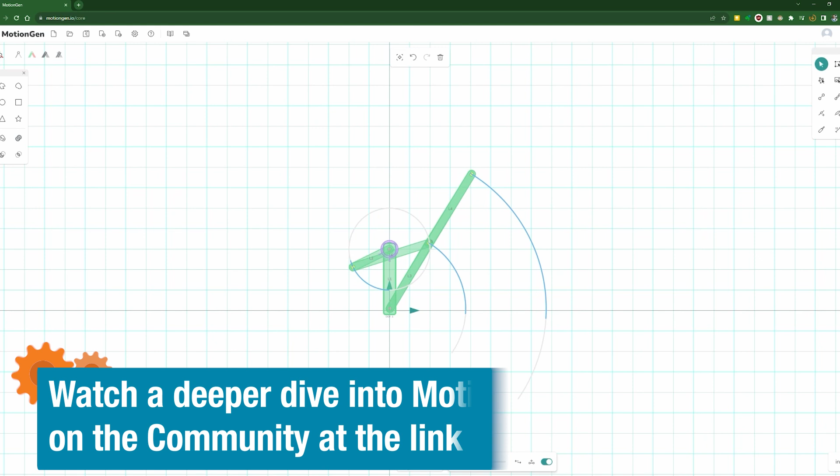I want to show you a free cool website I found. It's called MotionGen. It allows you to prototype different kind of linkages and mechanisms and animate them so you can see how they will work. MotionGen was a really useful site to test out and prototype the linkage system, but let's draw a rough sketch of what I want to make in the end. So of course we want to hang the ornament on the Christmas tree branch.

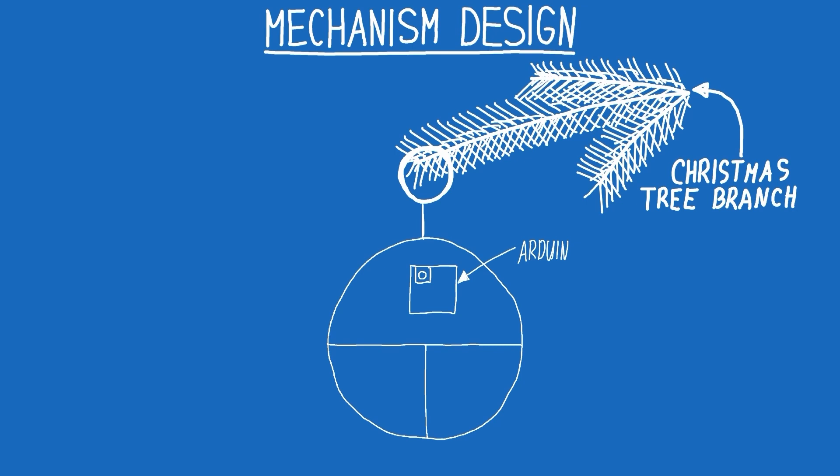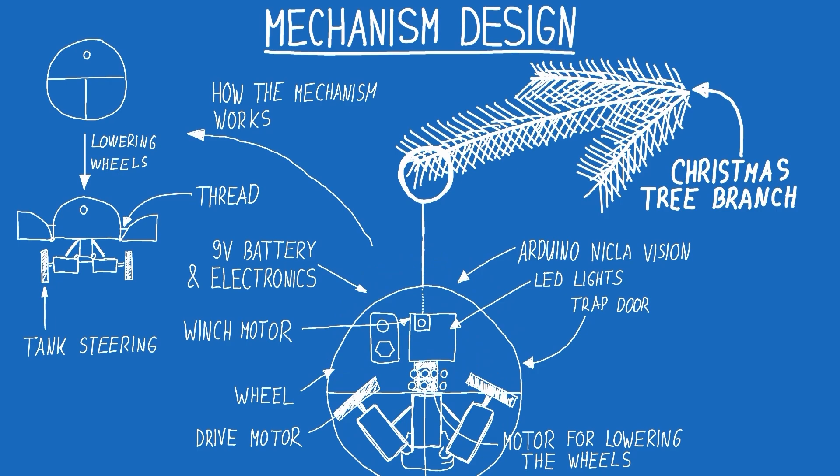I'm going to use the Arduino Nicla Vision as my main computer for this ornament. We will have two drive motors so we can have tank steering with wheels on them of course, and we will have a central motor for actually lowering those wheels. At the top we'll have the winch motor for lowering up and down the whole ornament. 9-volt battery, electronics. Here is how the whole mechanism works. The trapdoors open and the wheels drop down when the position servo actuates, and that's how the whole system will work. Let's jump into CAD to actually model this thing and then go to making it.

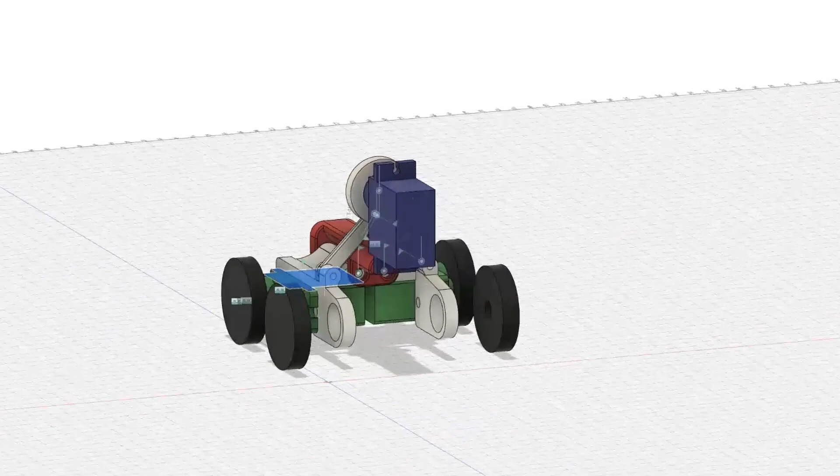So we have this blue position servo, which by turning 180 degrees will lift these two segments up. These green motors are the continuous rotation servomotors, and this here is just a hole for the bearing that will go here. So how this mechanism works is, if we drive this joint upwards, you can see both sets of wheels going up, and this is how this looks packed. It took a bit of playing to see how big the wheels can be, as well as the distance between the wheels, so everything gets packed nicely.

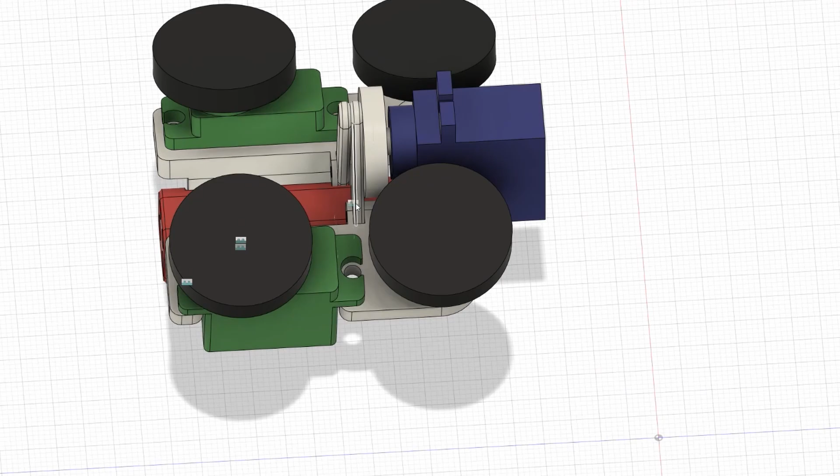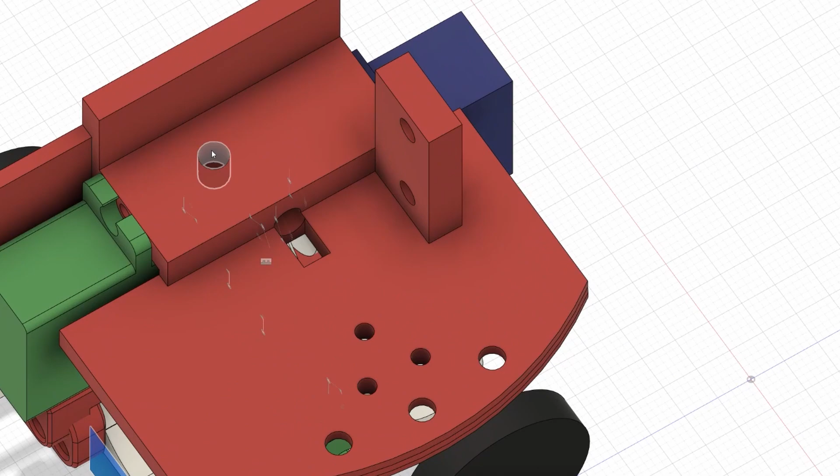Now let's take a look at how the whole robot will go up. So this is the winch servo, and this is the small winch onto which we will actually just add some thin but really strong fishing line. On top of that goes what I call the upper bridge. This is the platform that will hold all of the electronics, but also has a 4mm hole here for guiding the line from the winch servo to the top of the Christmas ornament.

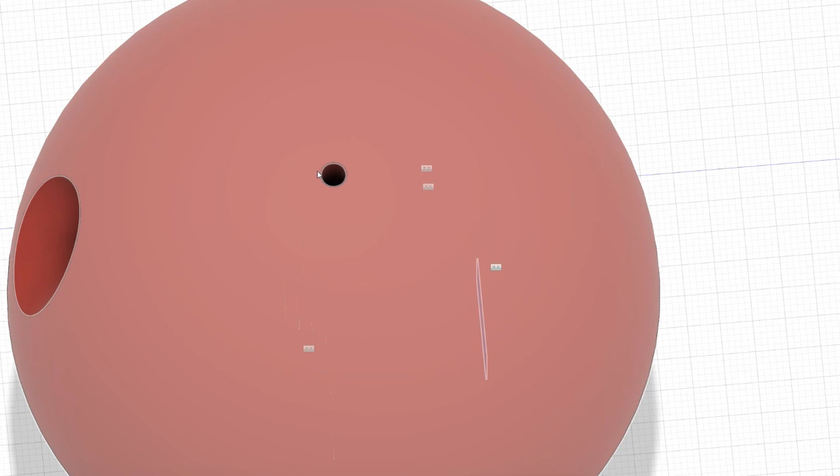The idea for the 4mm hole is to use a piece of PTFE tubing that's usually used for things like 3D printers, so the line has a smooth path. And on top of that we have the top dome, so this is where the PTFE tube comes out and the line goes out. The last part from the mechanical aspect of the design is the bottom half of the Christmas ornament. The first part is this part, which I call the shell ring. It attaches to the top half.

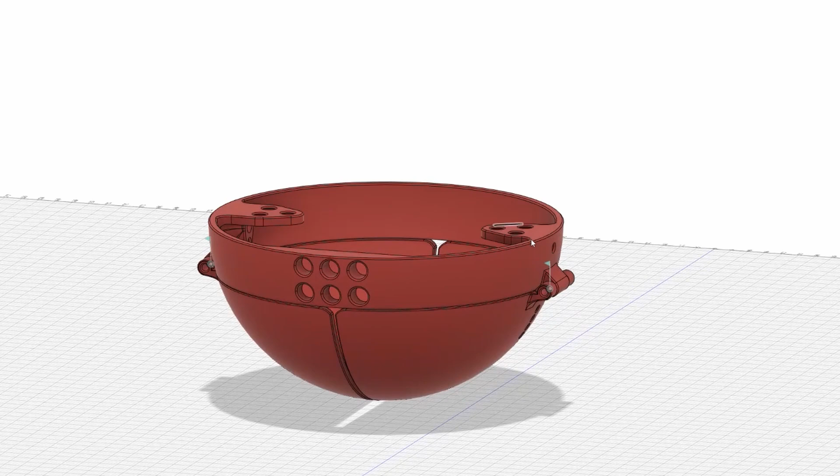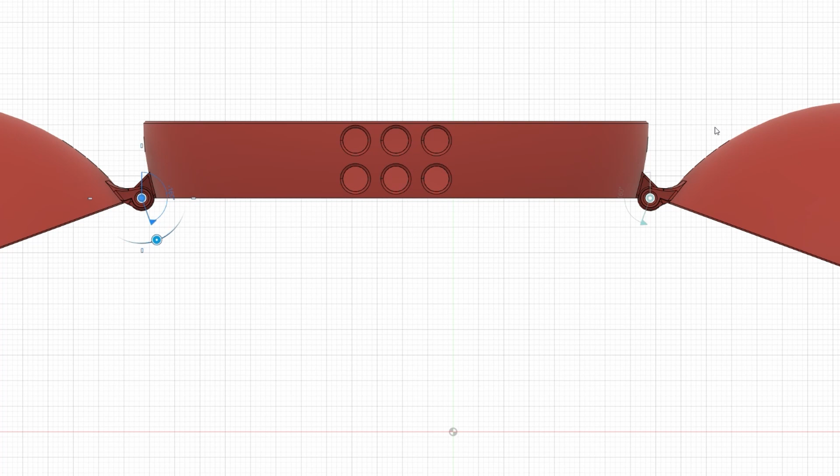It houses the 6 LEDs that we want for night driving, let's call it that. And it also has the mounting points for the trapdoors. So how this works is I had to put the hinges on the outside for the trapdoors, so the angle at which they can open is enough. They will open at about 150 or 160 degrees, something like that, so that when they're open, the wheels have enough clearance to actually touch the ground without the trapdoors themselves scraping the ground.

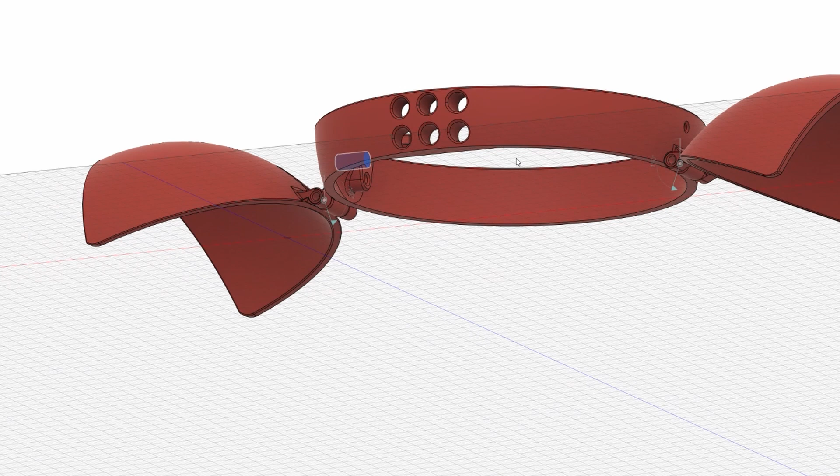The trapdoors are actuated using string that's pulled by the same servo that lowers the wheels. The string is attached to these holes on the trapdoors. It goes through here and then it just attaches to the same spot as the linkages for lowering the wheels. The only other thing is how do we return the trapdoors. They're returned by attaching to this hole here and here by using a simple rubber band. It's a simple solution, pretty crude, but it does the job.

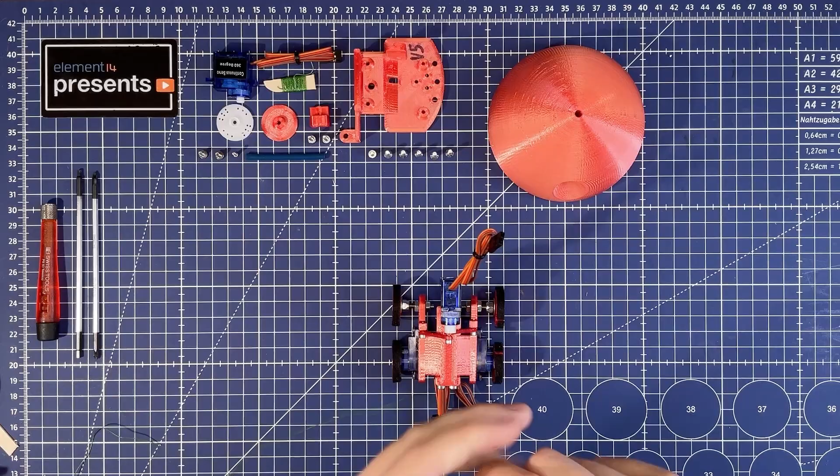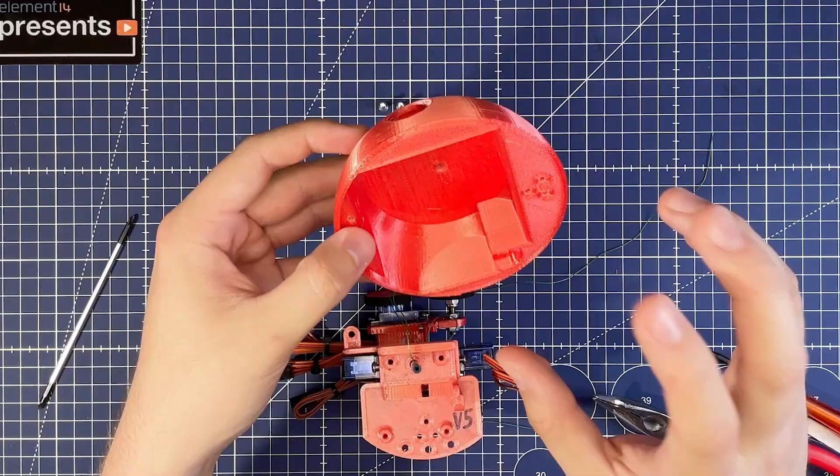So the idea with the string is it will pull the trapdoors from the outside so they open. And with that we have attached the winch motor to the main assembly. Before we actually screw it on, it's much easier to now thread all of the wires through. And now we're supposed to attach this whole assembly to the top dome. And with that we have the whole top half assembled, as you can see.

Before we actually assemble all of the electronics, put everything inside and also add the trapdoors, I think it would be fun to actually test out the winch, seeing the whole robot going up and down. I've just hung it using a keyring on my top-down filming rig, and I've attached the Arduino that we used for testing the servomotors. So it will go one way for 3 seconds and the other way for 3 seconds. So let's power it on and see what happens.

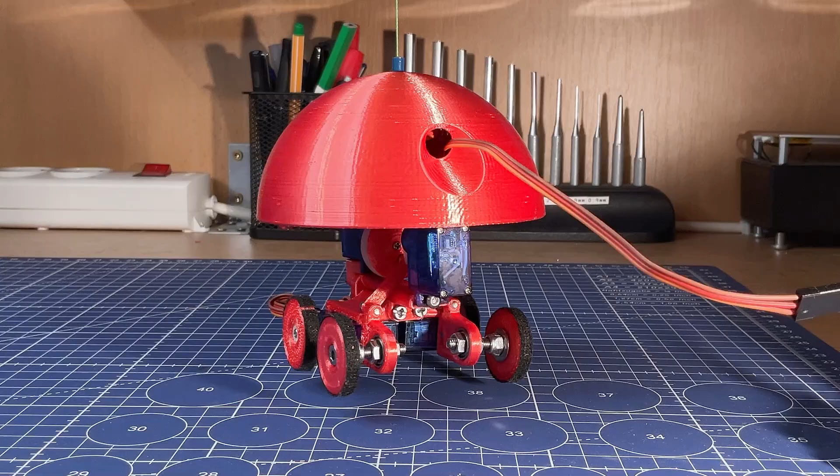It's going up now. It's going up a bit slower than going down because of the force that's actually applied to the motor. But again, the motor is plenty powerful to actually get the whole Christmas ornament up, which is amazing. This is by far my favorite part of the mechanism.

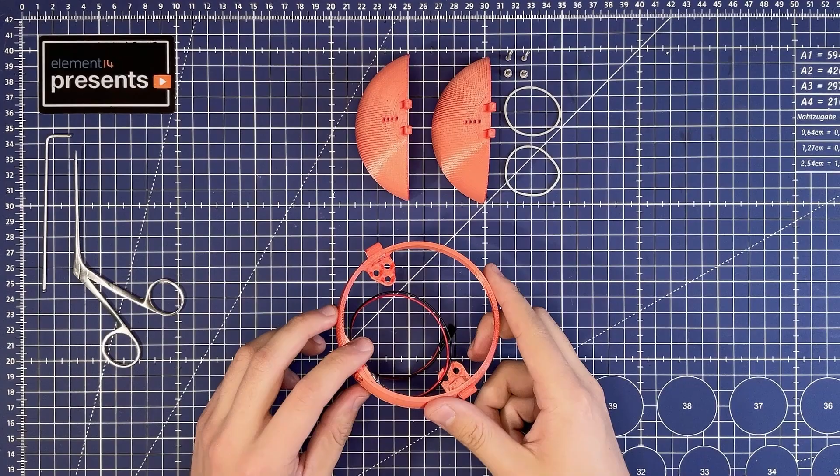Now that the top half is complete, all that's left to do is assemble the bottom half. So this is the shell ring we've assembled previously and soldered and tested the LEDs, as you can see here. Now let's first attach the rubber bands before attaching the trapdoors to the shell ring. And as you can see, both are now moving pretty freely.

We need to tension this rubber band, and with that everything is finished when it comes to the bottom side. So now when we open this, it will just close because of the rubber bands. So that will be it for the whole mechanical assembly of the Christmas ornament.

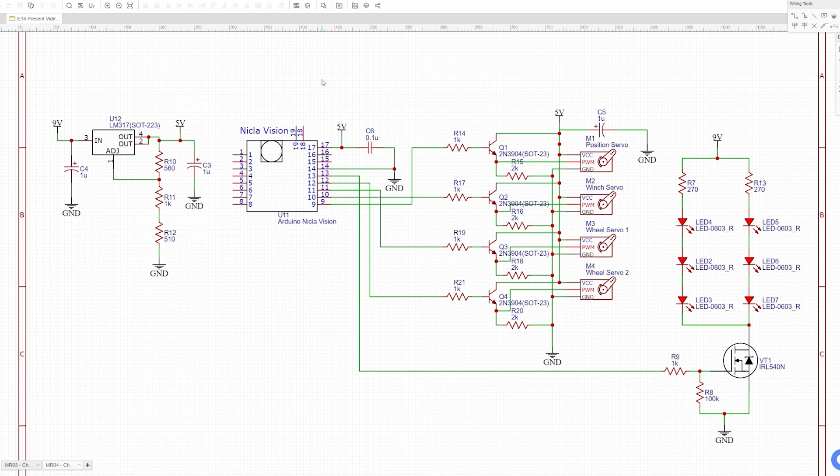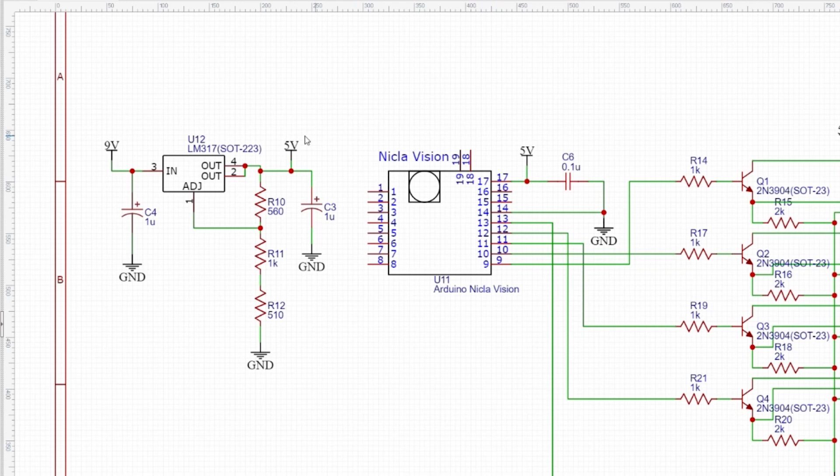Now that we're done with all of the mechanics around the robot, let's take a look at the electronics and all of the things that will go into the robot. So I want to power the robot using the 9-volt battery, but we need to drop that voltage down to 5 volts to power the Nicla Vision. The VIN pin on the Nicla Vision can handle anywhere from 4.5 to 5.5 volts. So I will be using a linear regulator to drop the voltage down to 5 volts.

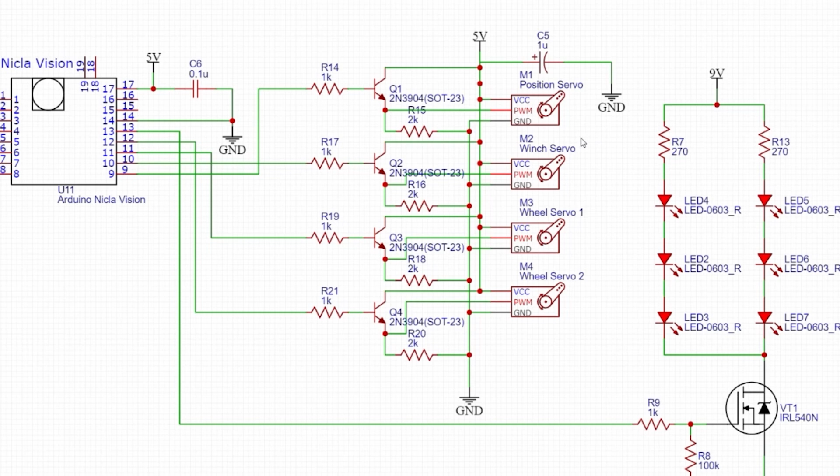Besides that, I'm using a small MOSFET to actually control the 6 LEDs for the lights, so we can also drive the robot at night when nobody's looking at the Christmas tree. And besides that, we only need to control the 4 servomotors. To actually control them, I had to add small transistors because the pins actually weren't strong enough to drive the motors properly, especially the continuous ones, because the PWM signal just didn't look too good, and this is the easiest way I found to fix that. Okay, so let's go and solder this before we can actually assemble the whole robot completely and test it out.

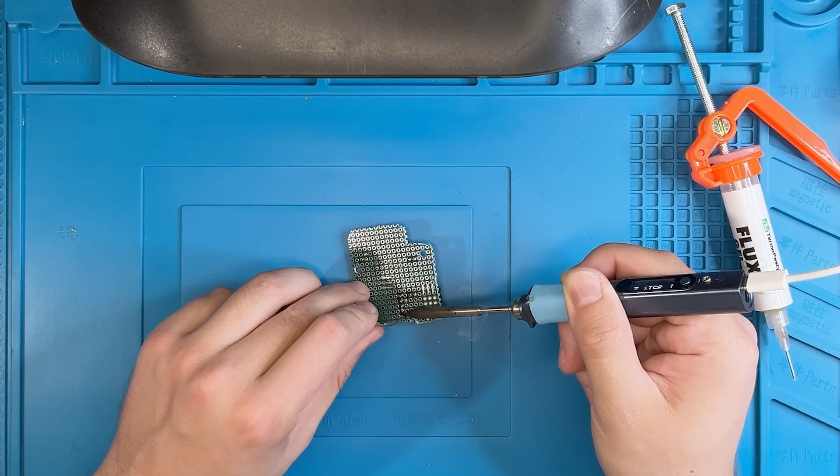So we can go forward, back, left, right, put the wheels up or down, turn the lights on or off. And while we're doing all of that, we're also live streaming. So that would be the whole code.

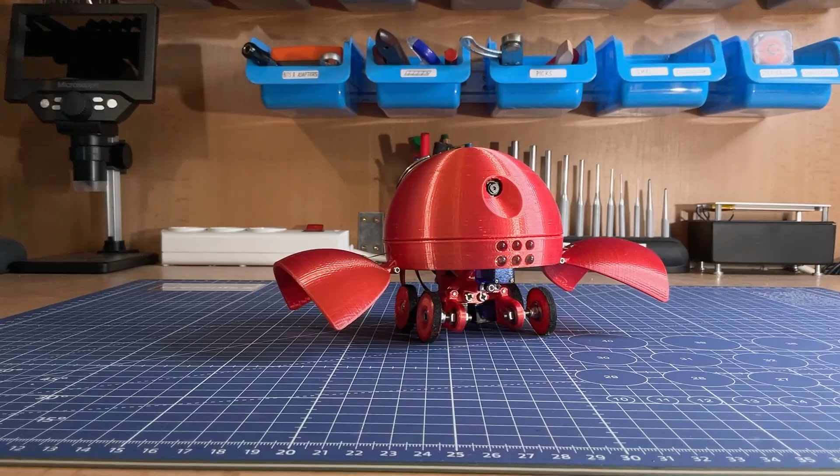And our ornament is finished. This is a great little robot. It was really challenging sticking to a round shape. If I had gone with a square box, it would have been much easier, but I think it was a pretty nice and fun challenge. Not everything works as well as I wanted to, as you will see now in the testing, but nevertheless it was really fun designing and building it.

The hardest part was actually getting all of the electronics in. It ended up being 100 millimeters in diameter, but a pretty heavy Christmas ornament. It actually weighs 300 grams. Let's go and test it out on the bench and then put it on the Christmas tree to see if we can maybe spot some of the presents underneath.

I have the robot hanging from my camera rig again. Let's first lower down the wheels. There they go. Okay, now we can slowly start winching it down. Okay, we are on the ground. Now we can even drive a bit. And we can of course winch ourselves up if we want to return to the tree.

I have some issues with the trap doors. They can't close up properly. So I have to use a piece of tape to close them up because of the strings and the geometry, but the opening up is good enough for testing.

Okay, now you'll be able to see the full setup on how I actually control the whole robot. So you can now see me while the camera is live streaming. There's a bit of a delay that you will probably notice when you listen to the audio and look at the video, but here you can see my controls. So for example, we can go winch down. There it goes. We can stop. We can go winch up.